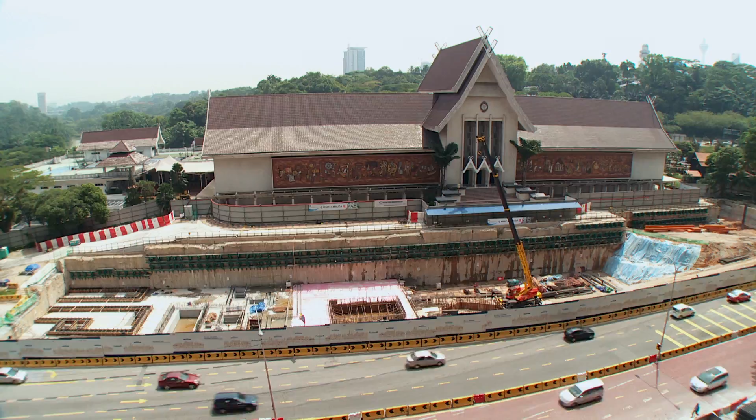Over the last 6 years, Greater Kuala Lumpur has undergone a massive transformation. A new MRT line has been built, covering a distance of 51 kilometers with 31 stations. The obstacles have been numerous, but Malaysian engineers have risen to the challenge to complete this mega infrastructure project. Very, very few countries can implement a gargantuan project like this and being able to implement it slightly ahead of time and also slightly below budget. MRT Malaysia, transforming Greater Kuala Lumpur into a connected, modern metropolis.

August 1957, Malaya gained its independence from Great Britain. 60 years ago, Kuala Lumpur was a small colonial township with civic buildings built by the British administration. Shophouses lined the main streets, and the tallest structure at the time was merely 9 stories tall. Today, Greater Kuala Lumpur is vast, more than 10 times larger than it was 60 years ago. The city is now a modern metropolis with an ever-rising skyline.

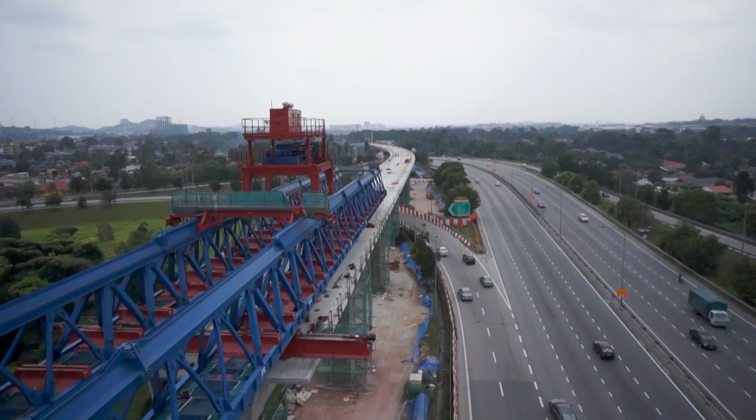First of all, you want a company or consortium that can deliver the project. Secondly, you want a project to deliver it on time and on budget. And thirdly, you want the risk taken off the government.

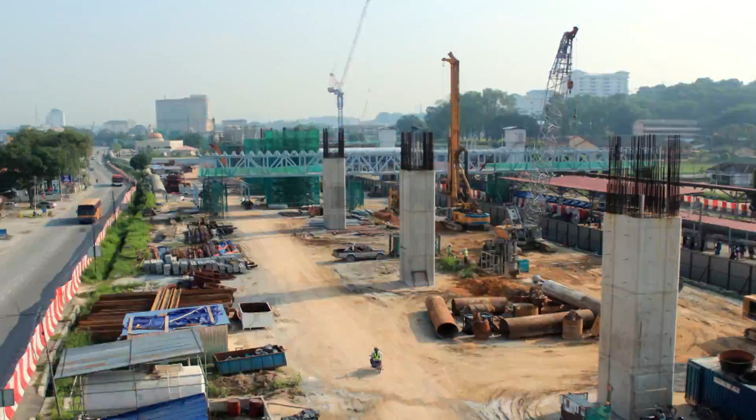To ensure the success of this project, a strict procurement process was put in place, with only the best contractors awarded the jobs through competitive bids. The government set a target for 30% of the value of all contracts for the MRT Sungai Buloh Kajang line to be awarded to Bumiputra companies, and they have exceeded the initial target.

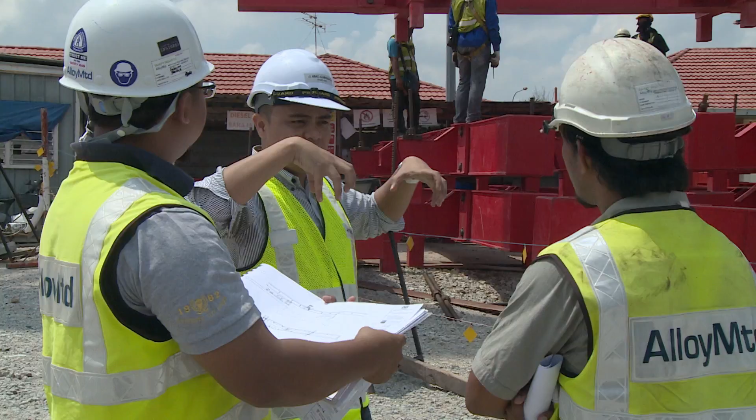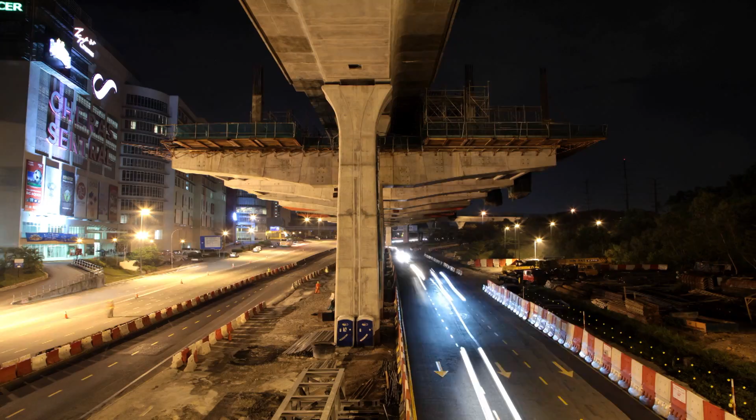The Bumiputra agenda will be an integral part of the KV MRT project. So we carve out a certain percentage of the contracts and give it out to Bumiputra, but it must be on the basis of competition. And the Bumiputra contractors that will be awarded will be on the basis of being the best amongst Bumiputra.

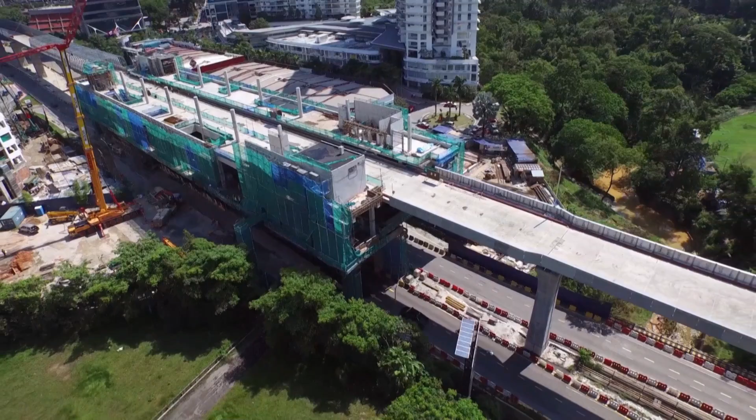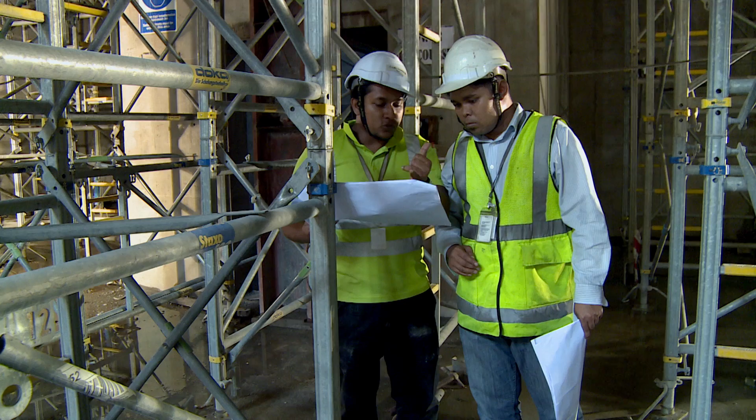The project has also provided opportunities for small-medium enterprises, or SMEs. We want this project to benefit SMEs so that the benefit will cascade to involve smaller firms. As part of this project, 480 SMEs have benefited, representing about 65% of the contract value.

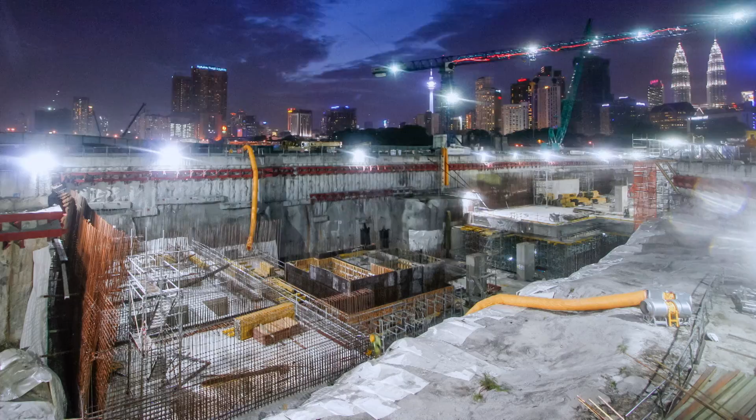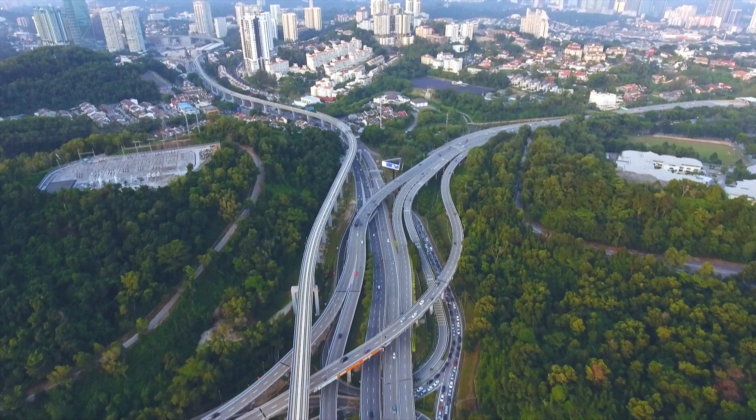Constructing a new transport system in the Klang Valley was not an easy task. The city was not planned enough to accommodate the high growth in population and development. That's why we had all this problem finding a corridor to accommodate this kind of large-scale mass transportation system. We had to share reserves and put this alignment where there are public roads or public highways. So it was quite a challenge to achieve that.

Majority of the line was constructed above ground along existing road reserves to minimize the cost of construction. Within the congested city centre, the MRT goes underground. Areas where we could go above ground, we went above ground. Areas where we needed to go underground, we went underground. Of course, when you go underground, the cost is higher, but in terms of the aesthetics, it's definitely better.

We didn't want to destroy any of the heritage buildings that we have. That was one of the policy decisions that we made - to have minimum changes to the existing physical landscape.

At the underground section of the line, landmark mutual agreements were drawn up between MRT Corporation and individual landowners, something that has never been achieved before. We're talking about people's private property acquired through generations from their father or grandfather, and there's a lot of emotion attached to owning this sort of property. So we tried not to acquire them. Our team managed to craft mutual agreements for each lot we wanted to work with. End of the day, you can coexist, and these property owners don't lose their land.

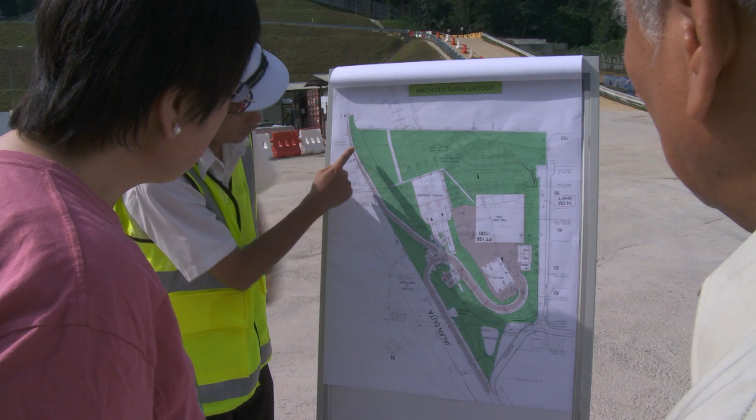To ensure that all parties were well informed of the construction activities, whether it is the community or businesses adjacent to the MRT alignment, stakeholder engagements were carried out. Can you imagine 51 kilometers, how many residential areas we're passing through? Can you imagine if we do not engage, we do not speak to the residents? I always believe that people management, people engagement, stakeholder engagement is crucial. If we don't manage them well, if they don't understand the project, where we are heading, it won't happen. For Line 1, over 2,000 engagement sessions were held with residents, residential associations, business people, traders, and other groups.

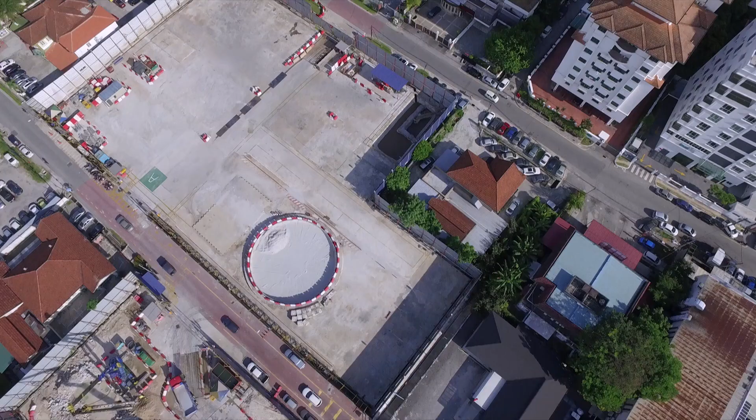This is my home. I've lived here for 45 years, and then you have MRT coming in. Like any project, there's bound to be traffic, there's bound to be noise. There were a bit of cracks, a bit of movement on the ground affecting the whole area, and there were individual meetings held by MRT's representatives, and my concerns were met, and I'd like to thank them for that.

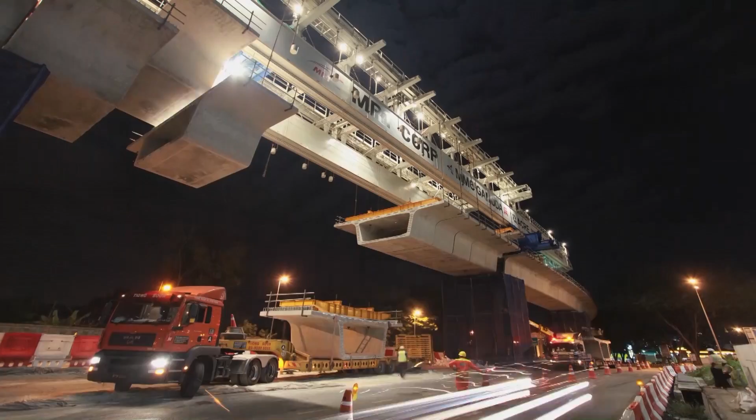The elevated section consisted of 1,400 piers to support 17,000 segmental box girders that formed the viaducts. 400-ton launching gantries were used to build permanent viaduct guideways by erecting the segmental box girders, or SBGs.

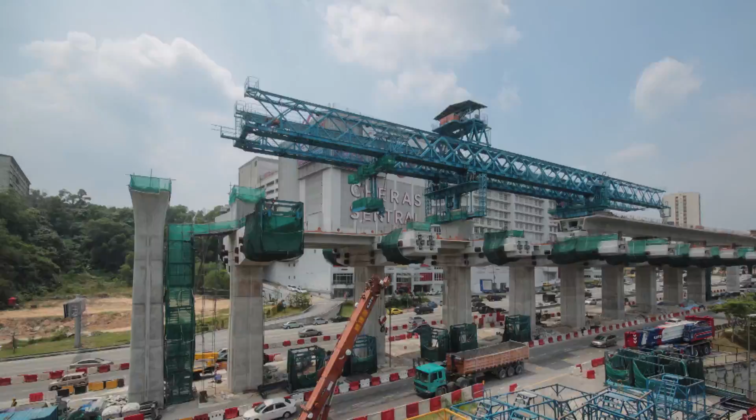The gantry is, in a sense, sitting between 2 piers - basically a sort of crane lifting mechanism. It lifts all the units together and aligns them so they're all in a nice line. At our peak, we had 21 gantries. That's a lot of gantries.

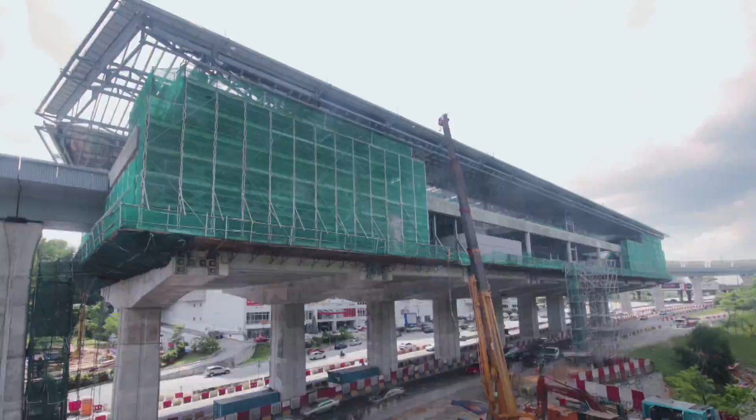After completion of the viaducts, the elevated station structures were constructed. There are 24 elevated stations, 12 in the northern section and 12 in the southern section.

The design and concept of the elevated stations are inspired by the Malay Wakaf, a traditional shelter for travellers. The idea of the station was, we call it Wakaf - being a sort of pavilion structure that you find usually in the landscape, synonymous with paddy fields and things like this. But the idea of Wakaf is also that the transportation is a sort of a gift to the people. It's something for the people.

In keeping with the Malaysian identity, the station design is in tune with the country's environment. It should become a tropical station - big overhang roofs, natural daylight, naturally ventilated, public plaza. These were all a series of ideas under the umbrella of the concept of a Wakaf.

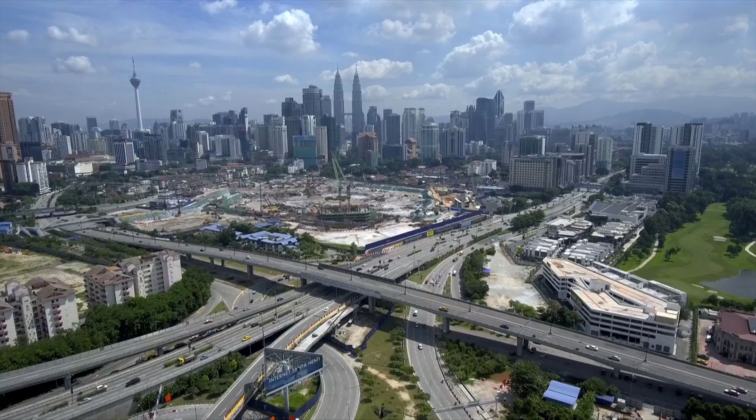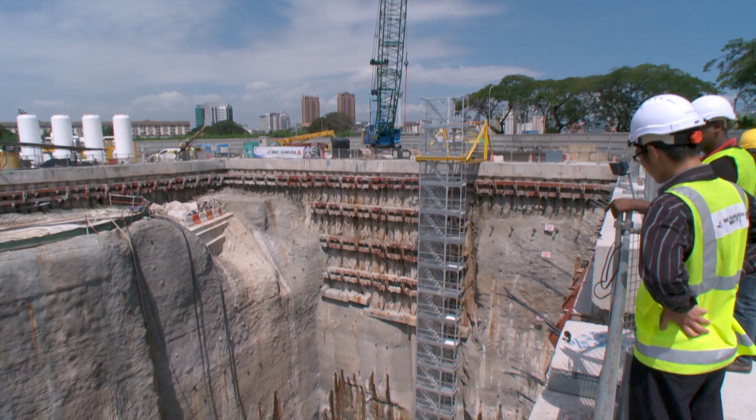To accommodate the construction within the city centre, 9.5 kilometres of the alignment is underground. The design and construction of the underground works was awarded to MMC Gamuda KV MRT Tunnelling Sendirian Berhad for their extensive tunnelling experience and technological know-how, including their construction of the Smart Tunnel.

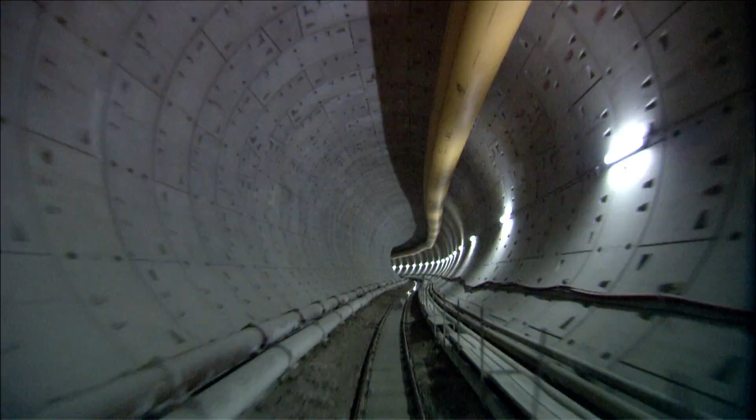But constructing tunnels in Kuala Lumpur's treacherous karstic underground conditions was challenging. During the building of the Smart Tunnel between 2004 and 2007, the team faced major collapses and sinkholes. Armed with that knowledge, MMC Gamuda KV MRT were able to design a new tunnel boring machine, the variable density TBM, to overcome these problems.

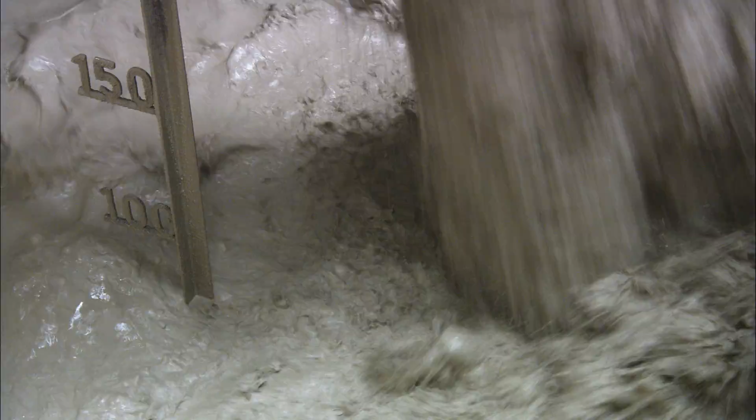The TBMs were used to excavate rock and soil with special tools fixed on a rotating cutter head. Bentonite slurry is pumped to the front of the machine to maintain the face pressure. The new machine can vary the density of the slurry, changing the consistency from a thin watery liquid to a thicker-like substance. The thicker slurry is used to fill hidden cavities, and its density prevents it from escaping through the porous rock to the surface, minimizing road collapses.

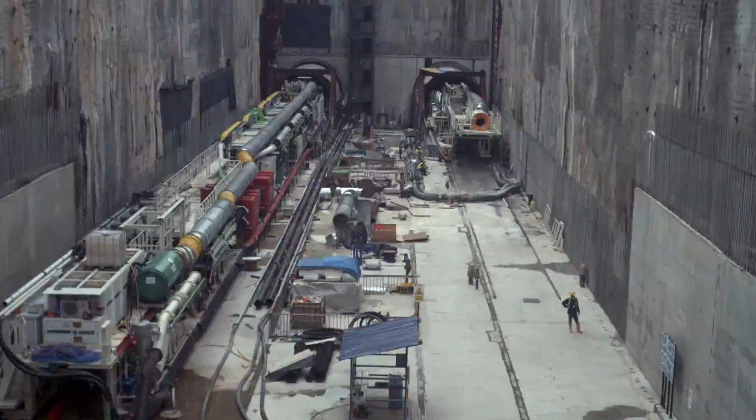8 TBMs were used to construct the underground tunnel, and it was launched from 4 different launching sites. The first TBM was launched by the Prime Minister of Malaysia, Dato Sri Mohamed Najib Tun Razak, on 30th May 2013.

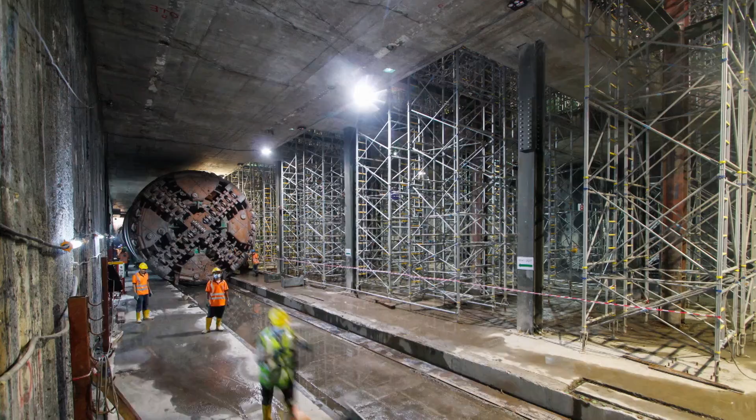It's actually a technological marvel. I was so impressed, I was in awe of that machine when I first saw it. It looks like a Star Trek movie, you know. And this is something that we can be really proud of.

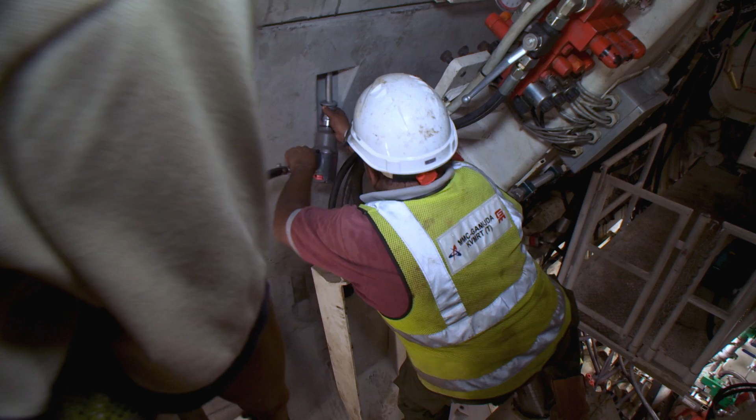The TBM is equipped to both excavate and build tunnel rings, which form the lining of the tunnel. Each ring consists of 7 segments and 1 keystone. A total of 11,500 segments were needed to line the dual 7.8-kilometer tunnels.

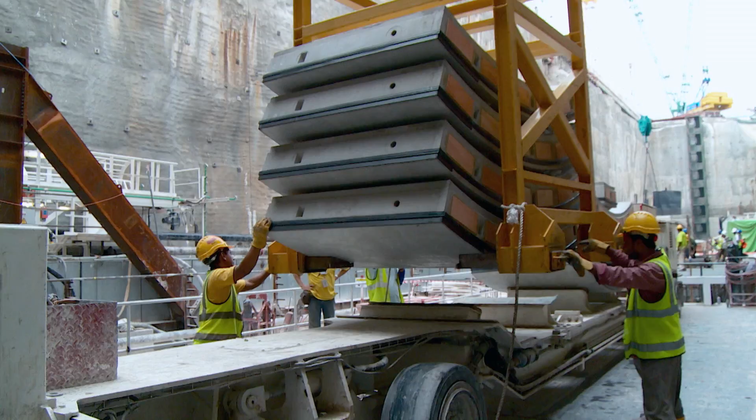The tunnel walls were constructed to be strong enough to stand extreme pressure and chemical attacks from the groundwater, and be able to endure settlement from poor ground conditions.

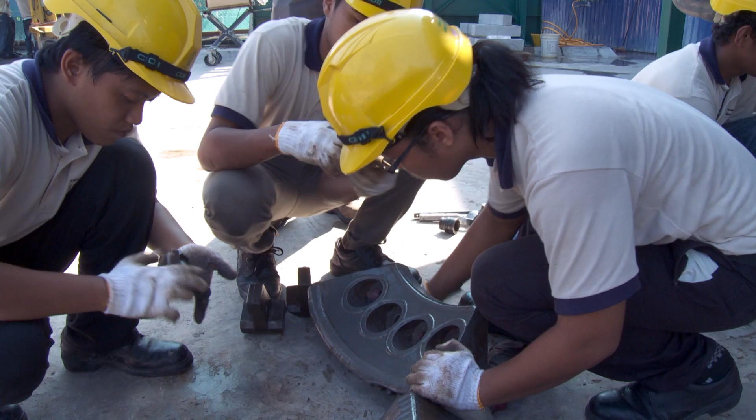The MRT tunneling project required thousands of workers over the 2-year period of construction, and MMC Gamuda set up the Tunneling Training Academy, or TTA, to train the hundreds of local workers needed for the underground construction works. The Academy is Malaysia's first training school designed to specially produce skilled manpower for the tunneling industry, and is in line with the government's aspiration to transform Malaysia into a high-income nation by 2020.

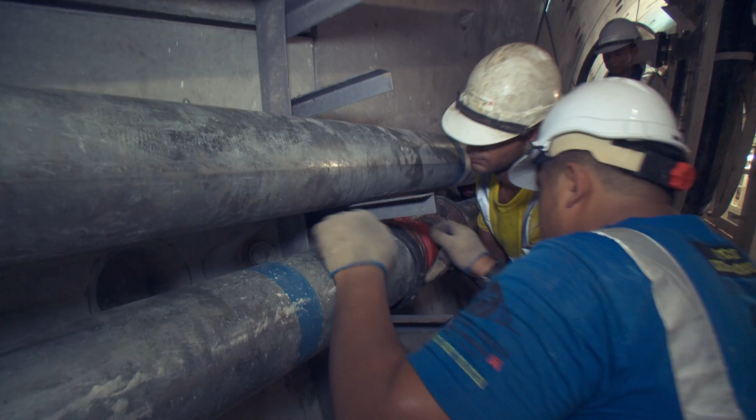People tend to look at a mega project in terms of the capital investment. But a mega project like this actually opens up wonderful opportunities for young people from the kampung to not only get jobs, but to be trained in a high technology field.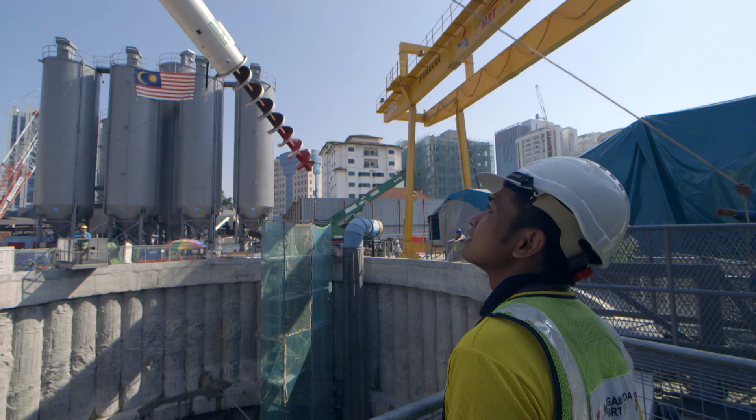Young Malaysian engineers have risen to the challenge to work on one of the most complex infrastructure projects in the country. I'm now handling one of the machines and running the full operation of the tunnel. I am lucky because I have good mentors teaching me how to actually control the machine, how to actually manage the people. It is quite challenging, but I think I like it because there's not many chances that you can be in a tunneling construction industry.

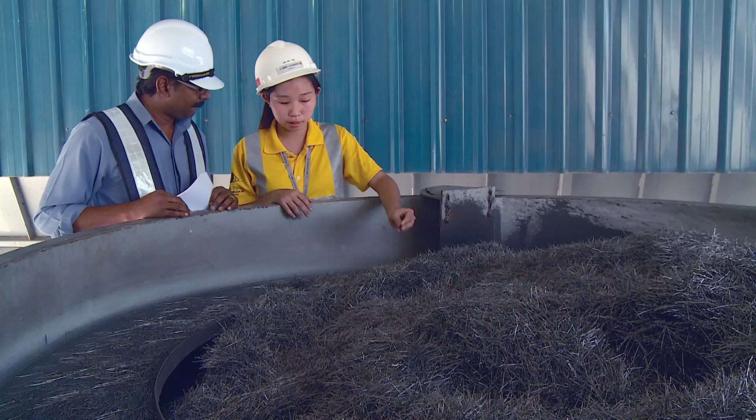With that kind of work experience, they can find employment anywhere in the world. And this is what excites me actually - young people, they have an opportunity to work in this project. And we can be very proud of the fact that it is actually being delivered by Malaysians and by a Malaysian consortium. Women have also played an important role in the project, taking on positions often dominated by men.

I think tunneling jobs is like one of the more specialist work that we have in the civil engineering industry. So this is definitely a golden opportunity. In my team, everyone is the same - I mean, if you're male or you're female, then it's the same.

If they're working inside the tunnel, inside the machines, then I'm also working inside the tunnels and also the machines. So basically, it's fair and square.

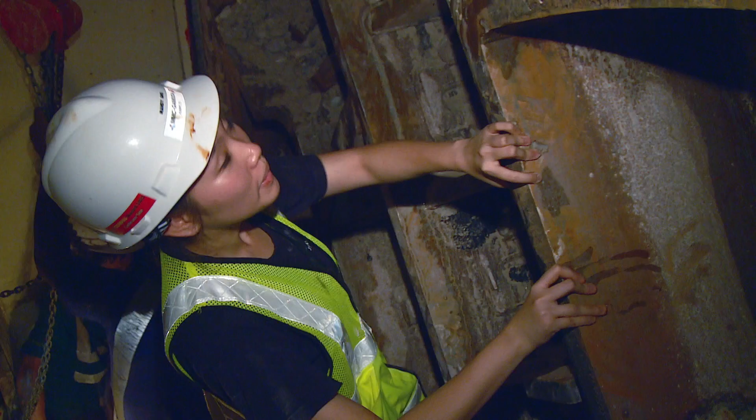We've always wanted more women to be part of the labour force, more women in the boardrooms, more women in top management, and more women in the technical field. So this project, when we see that it has succeeded in opening the door for more women to participate as engineers, I think that's a wonderful thing, and we want to congratulate Malaysian women.

The KV MRT project has raised the delivery and safety benchmark for the local construction industry to be on par with international standards. Safety audits and checks by safety officers were done regularly to ensure that the works carried out adhered to all safety requirements. Emergency drills were carried out regularly at the sites.

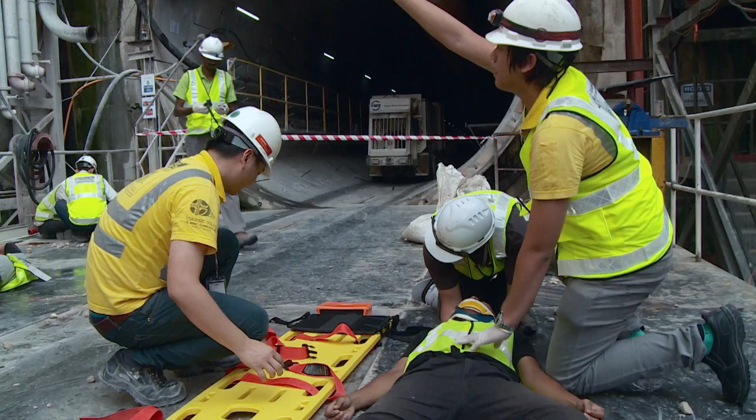As the construction of the underground section holds a higher risk, extra precautions were taken by the construction team, including firefighting. These safety efforts have been adopted by the Fire and Rescue Department and the Construction Industry Development Board, or CIDB. There has been a big improvement in safety.

Now there is an awareness about the responsibilities we have to our workforce and to the people working on the job and the members of the public, and we do the work safely and we don't take risks.

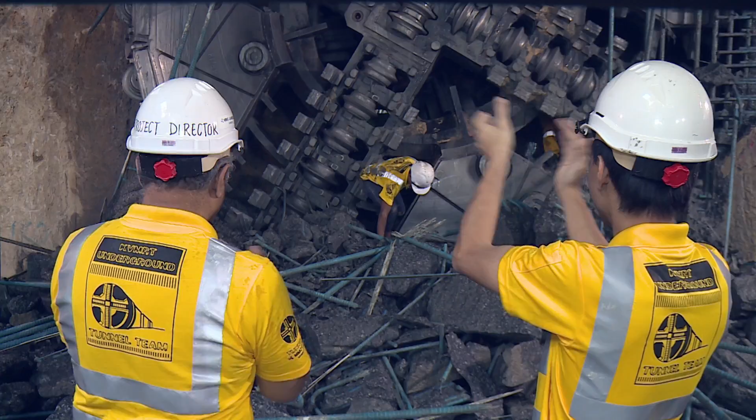A total of 11 breakthroughs took place throughout the 2-year period of the tunneling works. The last tunnel boring machine finally broke through on 11th April 2015, signaling the completion of the tunneling works. It was a thrilling moment for the team.

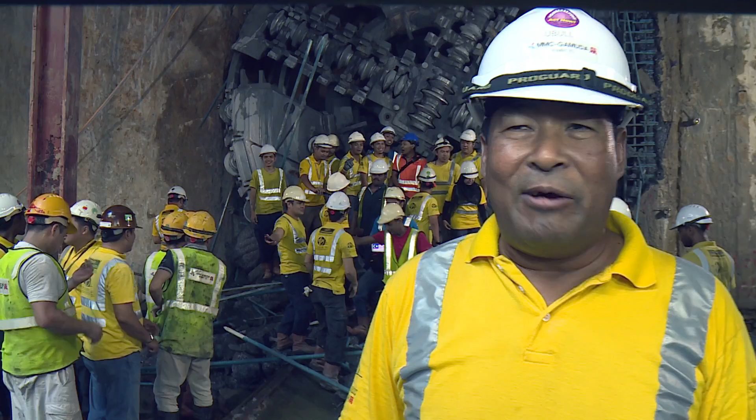We are improving ourselves. You can see 10 TBM already successfully implemented and completed without any problem to the surrounding. So you can see it's proven already. So I think we are very happy now, and we are very confident that we can do more for the next coming future.

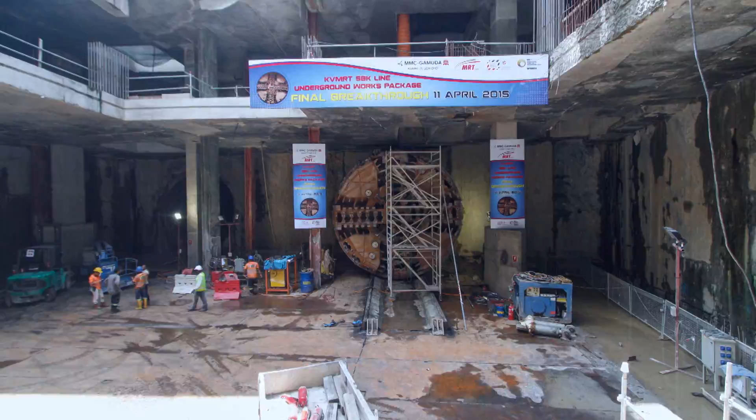The success of the variable density TBM resulted in a 95% reduction in the incidence of sinkholes for the KV MRT Sungai Buloh Kajang line compared to the tunneling for the Smart Tunnel under the same geological conditions.

The astounding innovation of the variable density TBM was internationally recognized and was awarded the International Tunneling and Underground Space Awards 2014 for the Technical Innovation of the Year category.

It certainly is a great achievement, and in terms of Malaysia, it will enhance our profile internationally. And the very fact that we can win the international accolades is a wonderful achievement for all Malaysians.

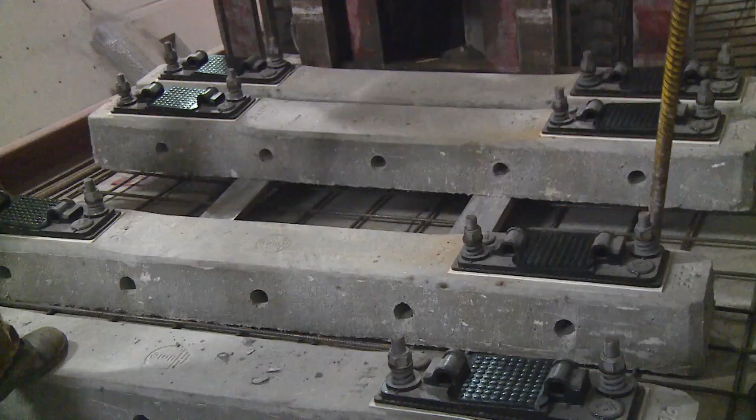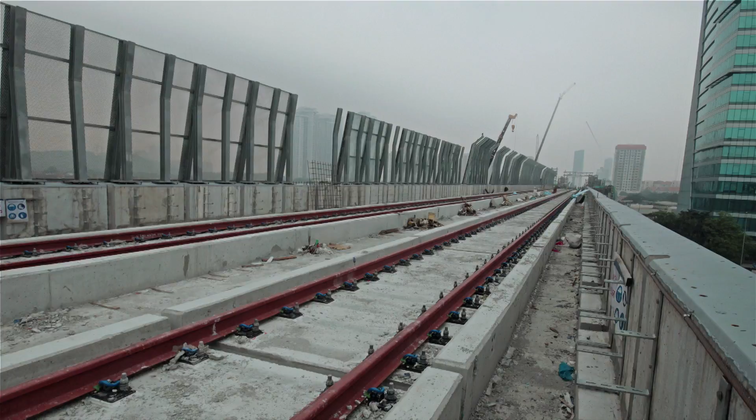After completion of the tunneling works, laying of the tracks for the underground and the elevated sections were done concurrently. The tracks were specially designed to reduce noise and vibration from the trains. The operation of the train will be powered up with electricity, hence the installation of power rails.

A walkway was also built throughout the alignment. It allows the passengers to evacuate in case of an emergency. Additional sound protection was also introduced to the elevated tracks.

There were certain areas that was very close to residential areas. And what we did was we have installed 3 different categories of noise barriers on the MRT alignment.

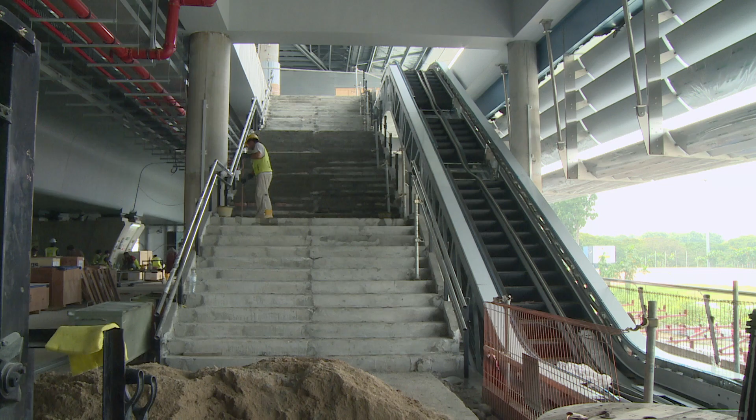At the elevated stations, final works were being carried out at station entrances. Each station has a minimum of 2 entrances. Some were built across major roads or highways. Besides staircases, entrances would have escalators or lifts, making most of them disabled-friendly.

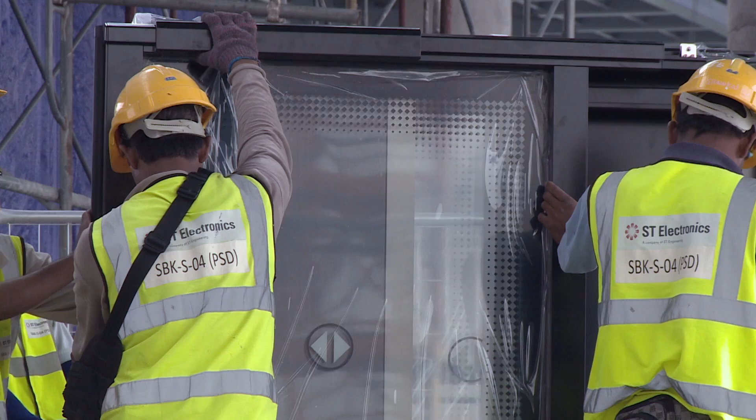At the platform area, automated platform gates were installed to separate the track and platform areas. This is a safety feature, and the doors will only open when a train stops in the station and when its doors are completely aligned with the automatic platform gates.

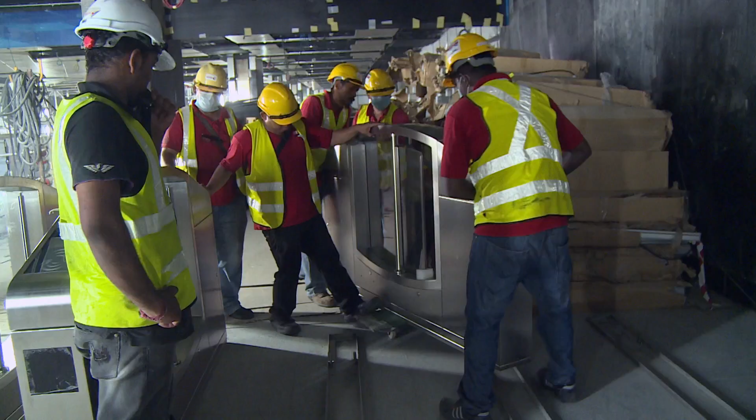Automatic fare collection gates were installed together with ticket vending machines, ensuring a modern cashless touch-on system.

58 trains make up the fleet for the new Sungai Buloh Kajang line. The trains were designed by BMW Group Design Works USA with the theme Guiding Light, representing strong and solid character, as well as modernity and timelessness.

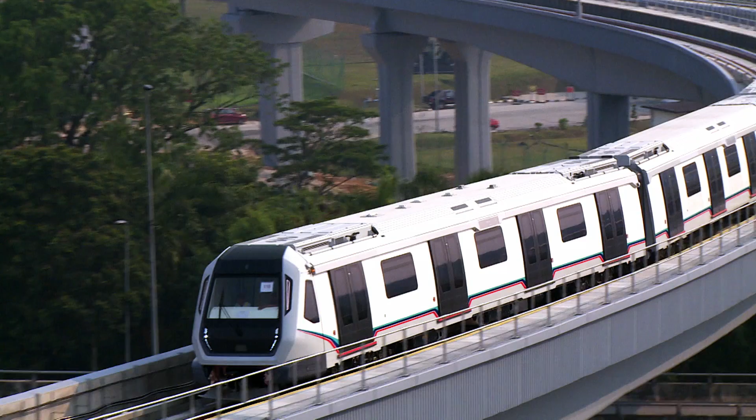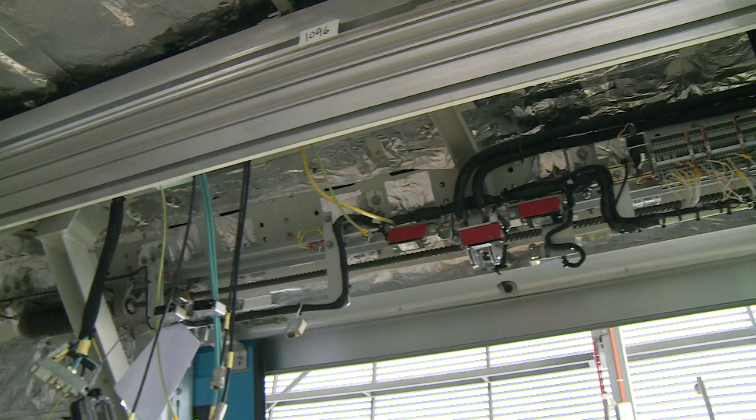Components of the train came from all around the world, but were also produced locally, such as the chairs and the LED lights. All the components were assembled at Malaysia's very first train assembly plant located at Rasa, Hulu Selangor.

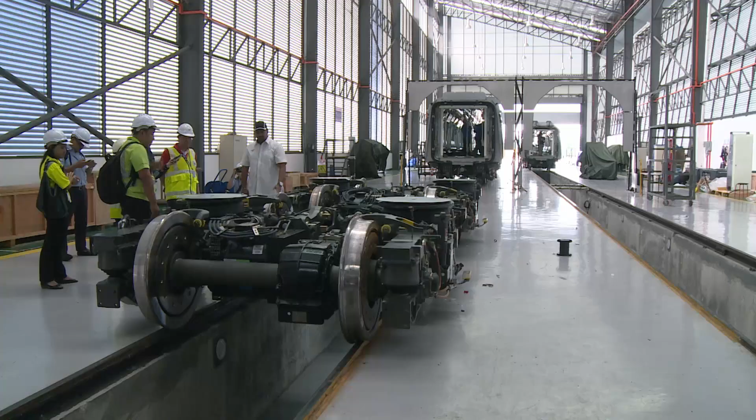For a full set of production in Rasa, it takes around 45 days for a train set. This is the first full-fledged assembly plant in Malaysia. Every single thing, the interiors, the exteriors, every single component here is fitted in Malaysia.

After all the components were installed, the trains went through a series of tests to ensure that everything was in place and installed precisely. The completed trains were transported to the Sungai Buloh Depot, the biggest train depot in Southeast Asia.

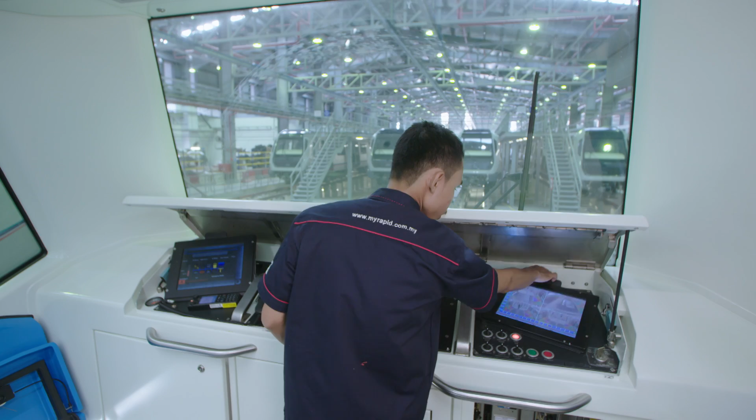This depot can house 60 trains of Line 1 and more than 40 trains for Line 2. It has all the equipment that can support the overhaul and heavy maintenance, in addition to the light maintenance, of the trains for Line 1 and Line 2.

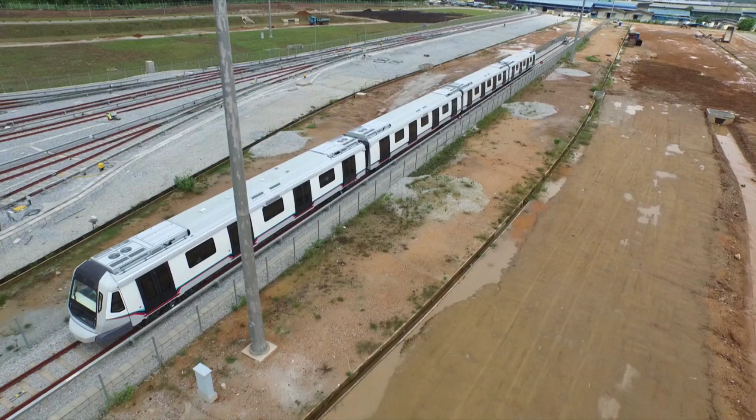The trains are of the latest technology. Its state-of-the-art integrated train automation system will ensure a reliable and highly efficient operation. We use a driverless system, so all the trains can be operated automatically by themselves, making it one of the longest fully automatic MRT systems in the world.

The trains are also equipped with enhanced safety features, with surveillance cameras installed on the outside and inside of the trains. We have 42 cameras per train, so we make sure that the passengers on board are safe, and they will feel the security of it and feel comfortable to travel on the train.

In November 2015, Prime Minister Datuk Seri Mohammad Najib Tun Razak visited the Sungai Buloh Depot to check on the progress of the MRT project.

I oversee this project overall, and I'm briefed on a regular basis, and I go down and look at the progress myself, and I intervene if there are problems. So everybody is committed, the entire government, to making this project a success.

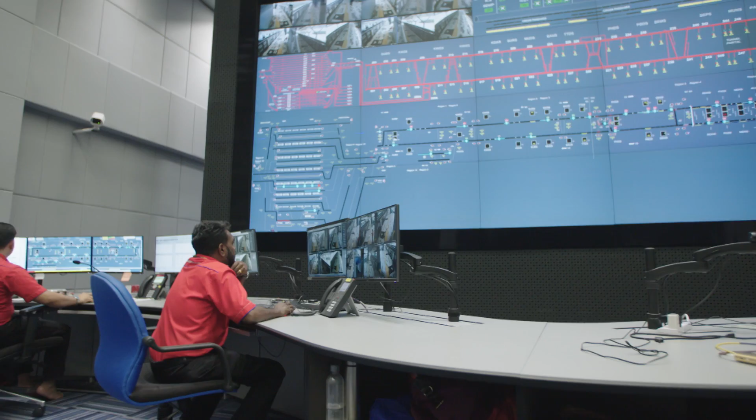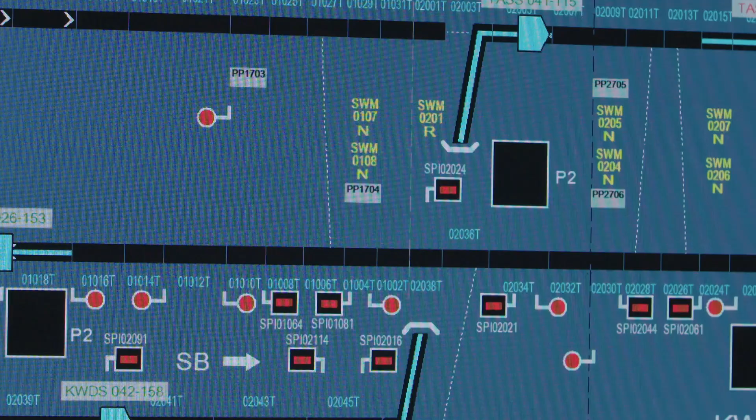The operation of the train is fully controlled from the Operation Control Center, or OCC, located at the Sungai Buloh Depot. The Operation Control Center is actually the brain for the entire fully automatic railway. It houses the computers and also the workstations controlling the trains and also the different systems of the railway. It allows the operator here to regulate the service so as to meet the demand of the passengers.

Say, for example, during the morning peak hours, in case of heavy rain where people don't want to drive because of traffic jams, there are more passengers using the train. Then the controllers here will be able to adjust the service, pumping more trains into service onto the main line to serve the additional passengers coming into the system. So it's the regulation of the service, which is one important function of the control center.

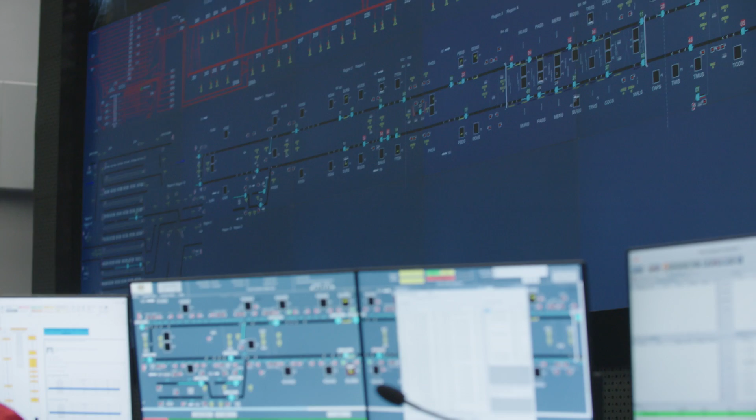The advanced train control system allows efficient and reliable management of this complex urban rail operation. By using wireless data communication between the trains, track equipment, and central traffic control, the system is able to be fully automated. The trains, when they come back to the depot, can be automatically routed through the automatic wash plant to clean the car body and then routed into their designated position to go into sleep.

The trains have a sleep mode overnight. Then in the morning, a certain period of time before the timetable launch time, the trains will be woken up and have the air conditioning units cooling down the interior of the train. The train will then be automatically launched into service according to the timetable, one after the other. So all of this is fully automatic.

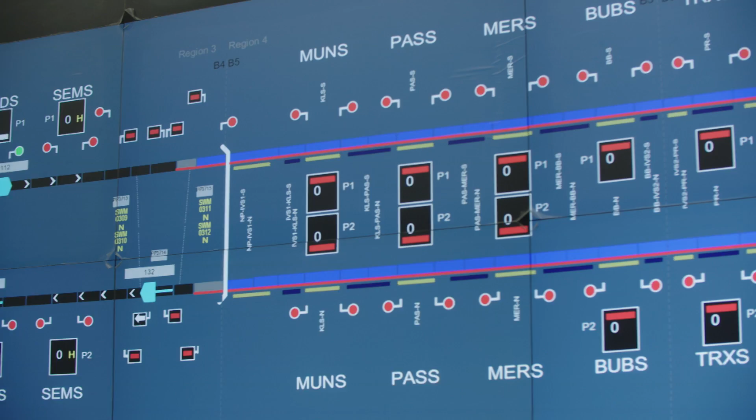Before the actual trains began operation, it was crucial to test the capability of the OCC to ensure that the system will run smoothly. We have entered the trial operation period.

These controllers are from Rapid Rail. They have undergone several months of training, not just on the system, but also the safety and operation rules and procedures needed to operate this railway. Trial operations ran for 3 months prior to the opening to the public.

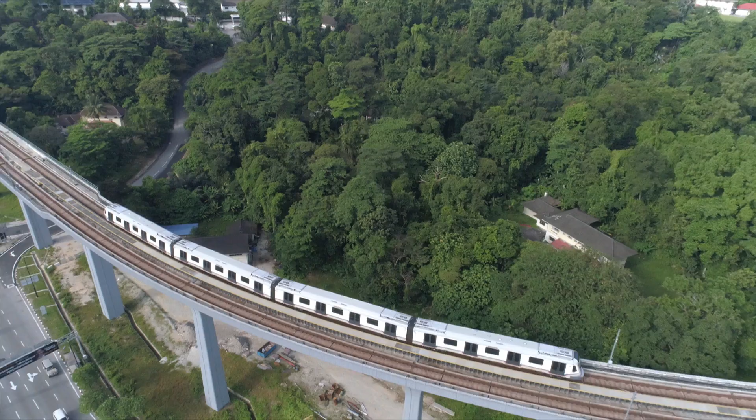Now we are in the process of increasing progressively the level of service, putting more trains onto the main line to let the trains and the system run in, to flush out any early bugs or failures, so that by the time we open the railway, hopefully we would have a very reliable and safe system.

After thorough testing and commissioning of the trains, Phase 1 of the SBK line from Sungai Buloh to Semantan was ready to be opened to the public.

On 15th December 2016, Datuk Seri Mohammad Najib Tun Razak launched the first Klang Valley MRT line.

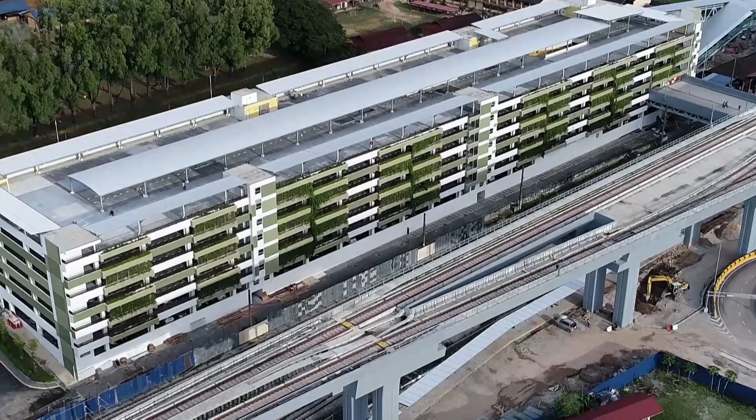To further support the MRT operation, feeder bus services are provided for MRT users. A total of 300 buses have been deployed to serve the communities along the route.

The opening of Phase 1 marked a major milestone of the project, but the work was not over. There's more excitement now because we're going into the underground section, getting ready for the Phase 2 opening, and the excitement is brewing. The MRT team had 7 months to complete the rest of the MRT line from Semantan to Kajang.

Phase 1 of the Sungai Buloh Kajang line is in operation and has been well received by the Malaysian public. The reaction has been wonderful, very positive. This has given us a great deal of encouragement that we are on the right track and that the future looks very encouraging indeed.

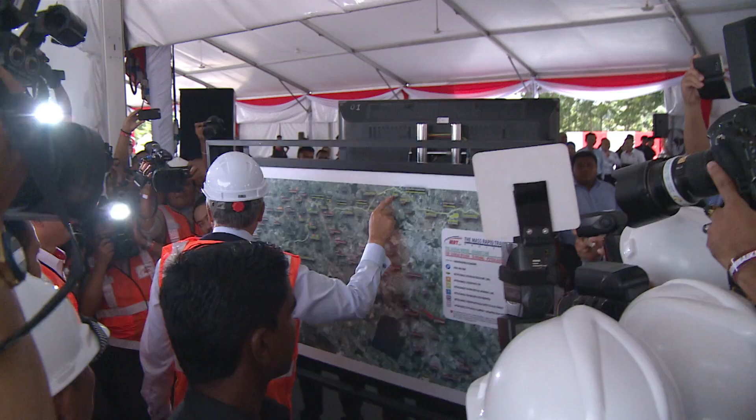But more is being done by the government to increase connectivity within the Klang Valley. The second MRT line, the Sungai Buloh Serdang Putrajaya line, was launched by the Prime Minister, Datuk Seri Muhammad Najib Tun Razak, on 15th September 2016.

I think it's important that there is integrated and seamless connectivity. We cannot achieve that with just one line. We need multiple lines. By 2020, we hope to achieve 40% utilization of public transport, and to get to 40% means that we're on par with some of the developed cities in the world.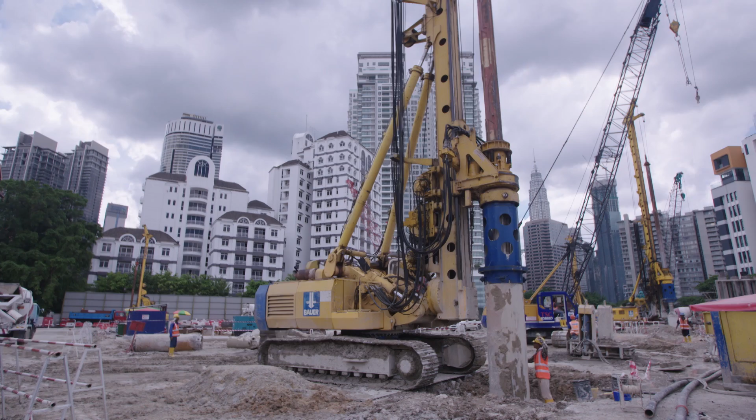The second MRT line is 52.2 kilometers in length and will have 37 stations serving a corridor with a population of 2 million people. Work has commenced with an expected date of completion by July 2022.

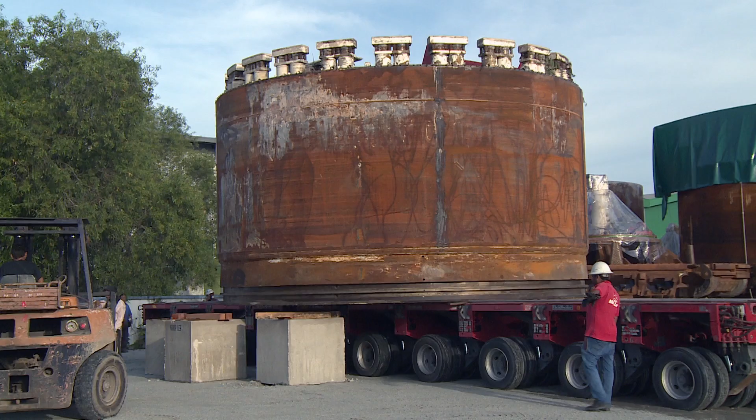At the TBM refurbishment plant located in Pusing, Perak, the tunnel boring machines used in Line 1 were cleaned and their components serviced in preparation for the second line. The facility, the first in Malaysia, enabled the transfer of TBM refurbishment technology to Malaysians.

The rush is on to complete Phase 2. The underground stations have been through tremendous change. The civil works for these stations have been extremely exciting, and they've been very unique around the world.

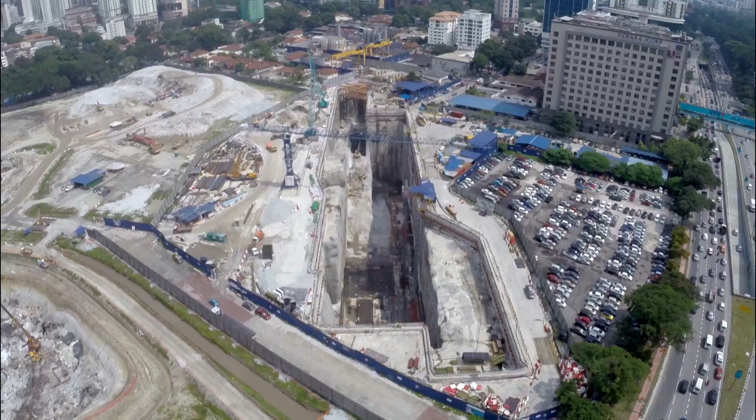This particular station site was in limestone rock, and it was the largest station, one of the biggest excavated holes in the city. From then on, we worked very hard to build these structural works within the station, and an enormous amount of steel and concrete has gone in, all managed very well and done within record time.

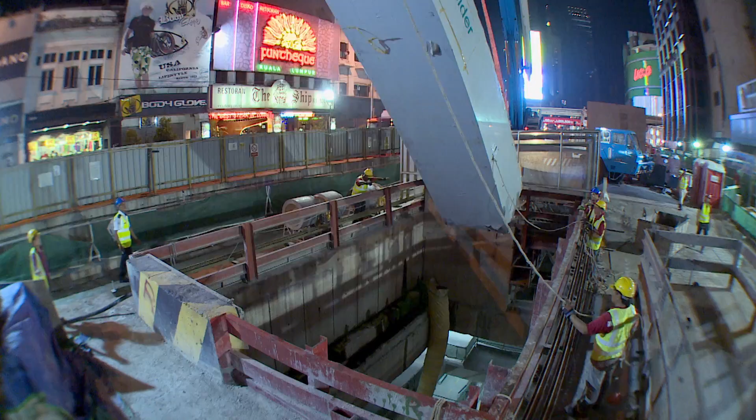Finally, when you actually have the primary structure ready, then comes all the fittings, mechanical, electrical, and the architectural, and all the systems. Everything has to be tested. Your doors have to be tested. Your PA system, firefighting, the wet side, all the water, the sprinklers, everything has to be tested one by one. So there is no system that is not tested.

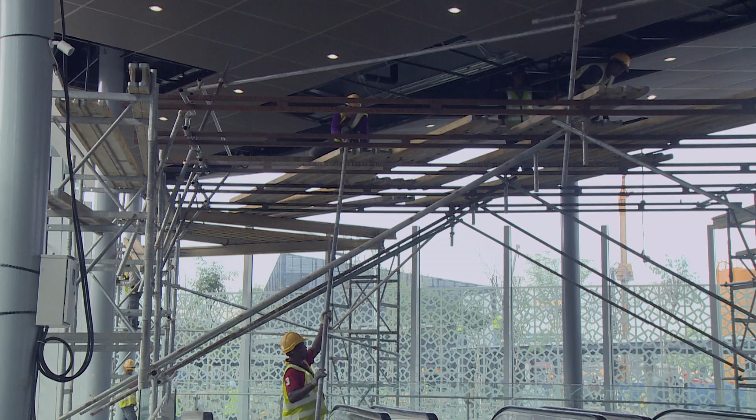With just several months to go for the Line 1 completion, the final phase of construction moved full steam ahead to ensure the targeted opening date was achieved.

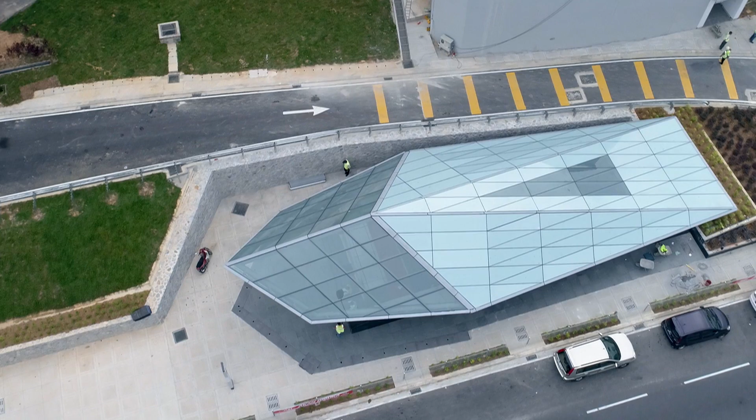The underground stations are inspired by the multifaceted quartz formation of Kuala Lumpur's Klang Gates quartz ridge. We took inspiration from it, and the multifaceted shape of the quartz crystal and its multi-coloured reflections resonate with the multiracial spirit and the cultural richness of Malaysia.

Each underground station has individual design themes that reflect each station's unique site and historical context. The Museum Negara station celebrates the history of transportation, and its theme of transition contrasts the treasure trove of all things old to the neighbouring new development.

Located near Stadium Merdeka, the theme for the Merdeka station is independence. Here, patriotic images are featured to represent that special moment in history.

The Bukit Bintang station is located at the Golden Triangle of Kuala Lumpur, a place that never sleeps. The theme of the station is dynamic.

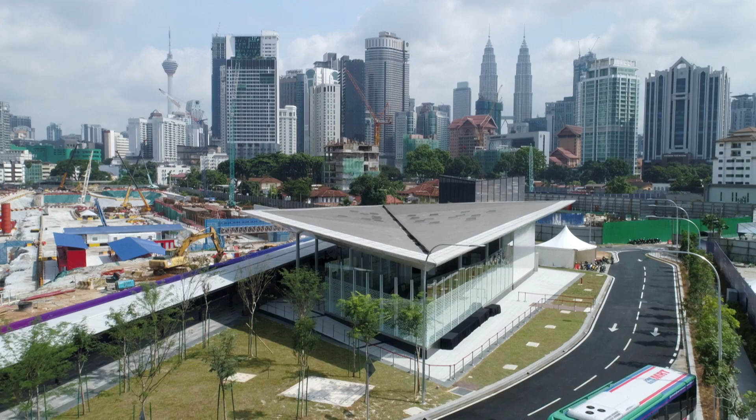The Tun Razak Exchange Station is located at Kuala Lumpur's future financial district. As Malaysia is at the forefront of Islamic finance, the theme of this station is Islamic Corporate.

Both Cochrane and Maluri stations are located in parts of Kuala Lumpur which are currently being transformed by two large urban regeneration projects. It is envisaged that both stations will play a major role in injecting vibrancy to the site context.

At the underground stations, uniquely designed benches by local students have also been incorporated. The design of these benches was selected through a bench designing competition, with the final design voted by the public.

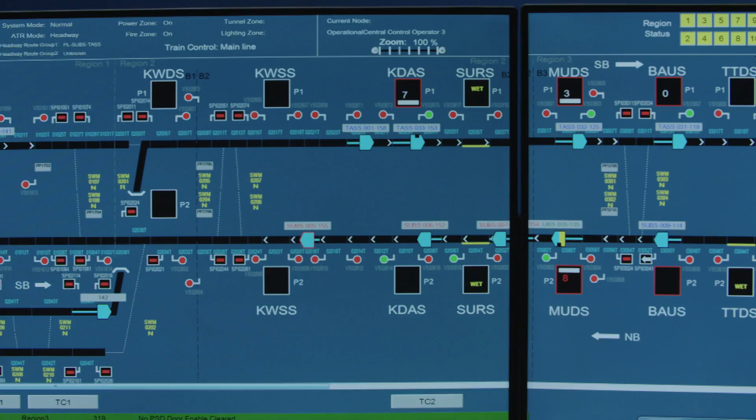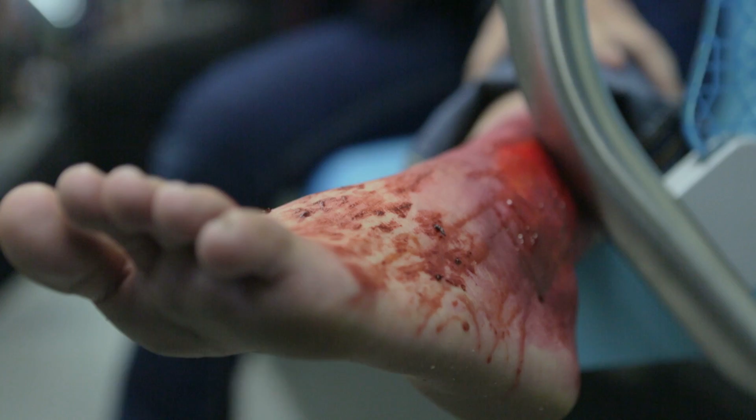An emergency rescue scenario is underway. A train has derailed in the underground section. Passengers are hurt, and a fire has broken out. Hello, hello, hello. Emergency, emergency, emergency.

Rapid Rail, in collaboration with MRT Corporation, have organised an emergency response drill in order to prepare for any unforeseen circumstances.

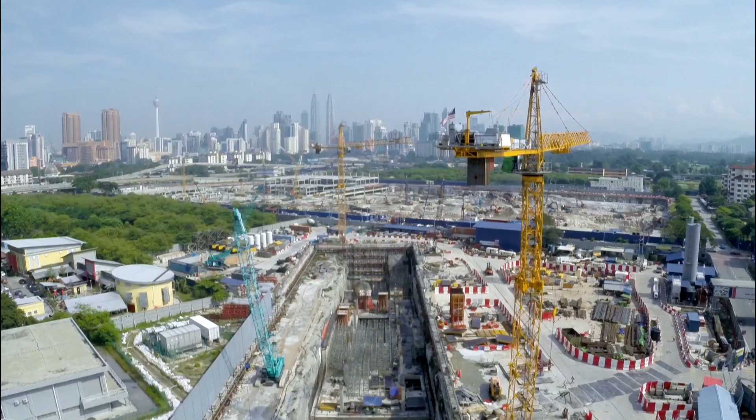6 years ago, the Malaysian government began construction of Malaysia's largest infrastructure project, the Sungai Buloh Kajang MRT line. Through the dedication of thousands of people involved in the construction, the landscape of the Klang Valley has changed forever.

After all the 66 months of challenging and hard work, finally we see it's a great day.

Quite proud of it. Apart from that, I think the quality has been very good, and our safety records and our environmental records have been excellent. I've been building railways since I was a young boy, and I think that this is a really good one. I think it's been a great team that has put this together, and I'm really proud.

Today, we are a step closer in making the Klang Valley a connected modern metropolis.

On 17th July 2017, the second phase was officially launched by the Prime Minister of Malaysia, Datuk Seri Mohamed Najib Tun Razak, completing the Sungai Buloh Kajang line.

I was involved at the outset when we conceived the idea of having this MRT service, and today we see the launch of Line 1. For me personally, it has brought home a feeling that you have done something very significant for the people of Malaysia. I'm so proud of the fact that this is a Malaysian project, managed by Malaysians, that can succeed to be ahead of schedule and below budget. I think it's very rare that any country in the world could have achieved what we have done for Malaysia.

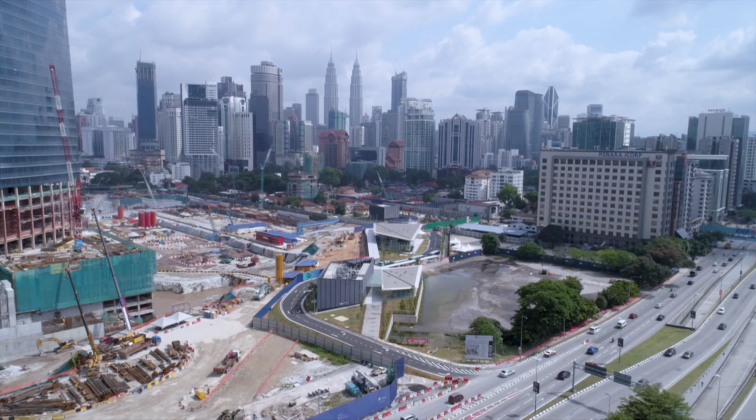I'm confident that given this project and the other mega projects that we are going to implement, that inshallah Malaysia and Kuala Lumpur in particular will be one of the leading cities in the world.

MRT Malaysia, exceeding expectations, changing lives for a better nation and future.